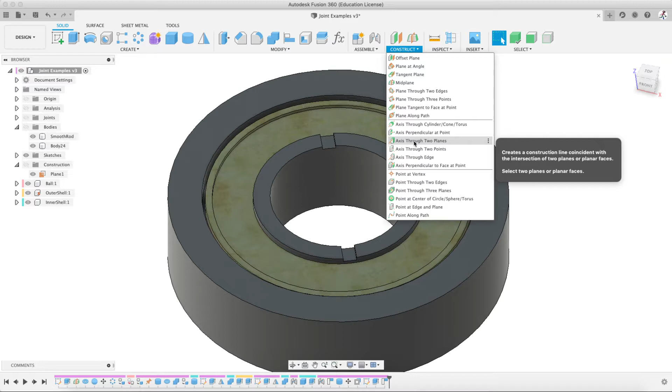Welcome back to another day of Fusion 360. We're going to be mixing and mashing different skills and workflows together, especially with joints and construction planes, because they're very handy. If you're not using constructions already, I really suggest you get the hang of how to use them, because they'll save you a lot of time and measuring in the future when you want to find a spot between things, over edges, or draw on something that isn't normally drawn on. Constructions are your best friend for that.

What you see in front of you is a basic little bearing. It's quite a large one actually, about 50 millimeters in diameter, still pretty large for most bearings people use these days. Whether this is a truck bearing, I'm not sure, but either way it has a few things inside it.

I used my favorite construction tool, as well as a joint tool that has a bit of a finicky process to get going the way you want for this type of object. It's great for very simple stuff - this is the rotating joint. But it's very difficult when you have an object like this, where the rotation center isn't on an actual thing, just a hole. We'll be looking at how to fix that, because it will apply to other joints, and I'll talk about the other joints quickly.

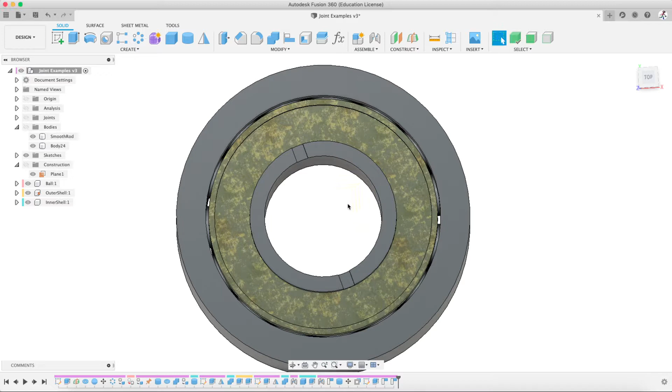In the meantime, I'm going to start at the very basics and we're going to work together. Create this bearing with me, right beside it - you can go right in the middle if you want, doesn't matter. But first, when you select your construction plane, we're going to create a brand new sketch and select the bottom plane or the top plane, depending. Doesn't really matter, it's the same thing.

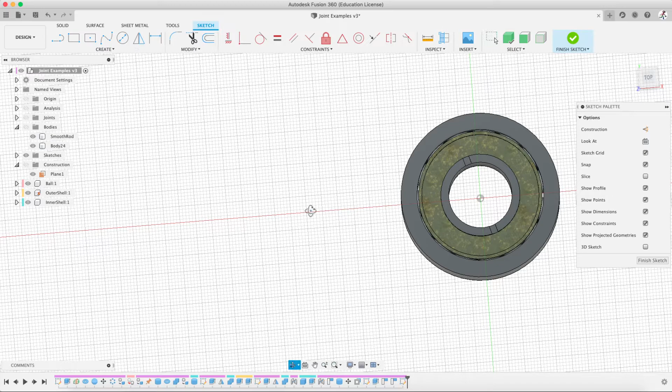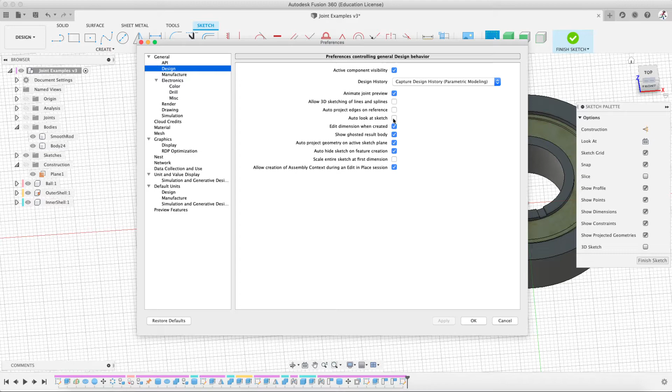You'll notice right away that my screen doesn't snap to the view flat on - this is my personal preference. It's in your preferences, I think under the first or second tab, called snap sketch to view. I'll go there right now just to show you, because it's nice to know. This is under Design, it's 'auto look at sketch.' Mine's unchecked, so this is just for me - don't worry if it isn't the same for you. I mentioned this in the previous videos.

So here we go, let's make a circle, and this is going to be the outer shell. Let's go 50 millimeters and just hit enter, that's it. Next we're going to make a second circle on the inside, and we're going to go 40 millimeters. This way we have an even 10 distance between them, and this will be the outer shell.

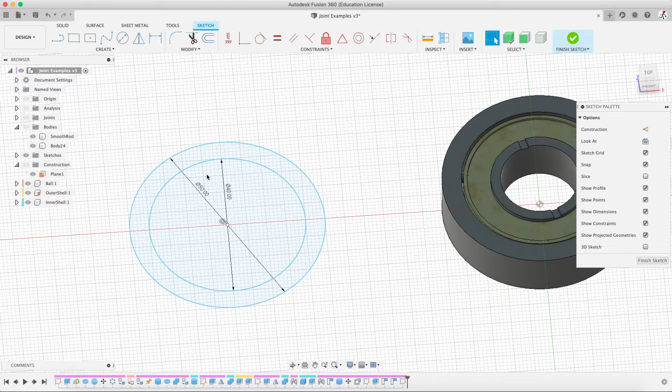What I'm doing is I drew a big circle, and then an inner circle that I'm only going to use a part of. So we can finish the sketch. We can hit E for extrude, or even Q for press pull - it does the exact same thing in this instance. Let's click on the outer edge of this circle, not the inside part.

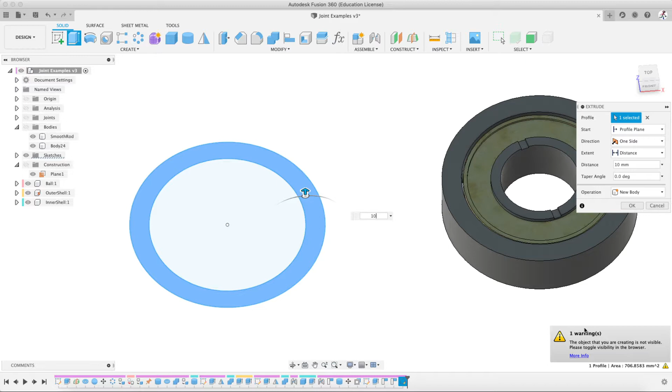If you have this clicked, just click in, it goes away. Hit 10 for millimeters and we will go up. I don't know why it's not working - E, 10, the object you're creating is not visible. That's why - bodies, okay, that's why.

So there we go, we have our object created. Next, we are going to have to cut out the inside, which is the same cutout for all these ball bearings. So before we even create a ball bearing, we are going to cut out the inside by finding the inside.

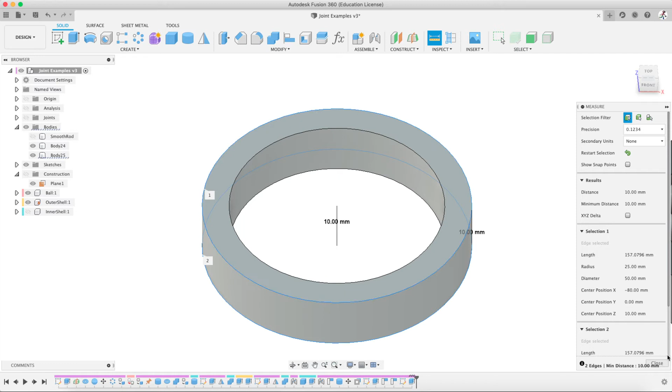Now, I know we are 10 millimeters tall, so I could create a cut in the middle and bring it down 5 millimeters, but let's do something easier. Under construction planes, go down to mid plane right here - mine is tagged at the top because I use it all the time. The mid plane is something that's super handy for really any object, especially when you want to mirror it later on, and we'll be doing that as well. So hit the mid plane.

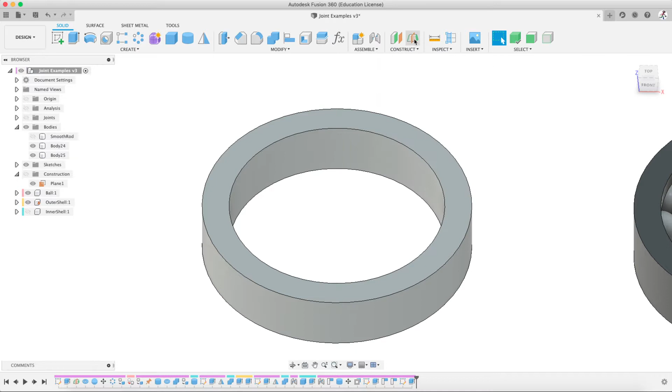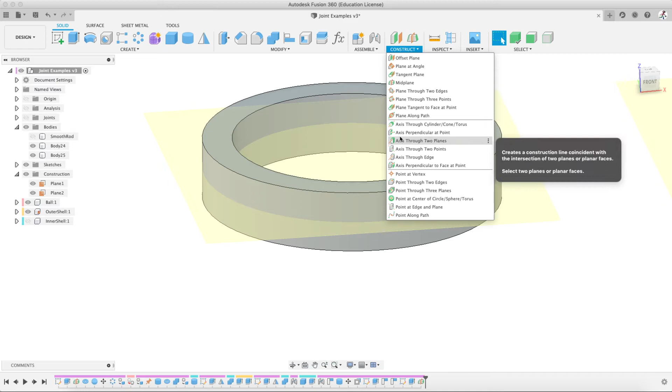All you do is select 1 or 2 edges, and what it does is create a brand new sketch plane that is adjustable. You can move it around if you want, but it's right between the two faces you selected. There's other versions, plane through 2 edges - if you select 2 edges, same idea, does pretty much the exact same thing, just a different selection process. There's way more in here - you can go through and figure out what they do pretty quickly, or just mess around with them. But there's a few you use often, and one of them, I promise, will be the mid plane. It is the best one, for me at least.

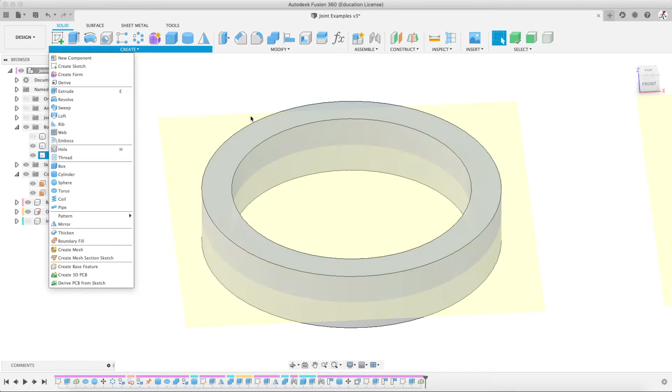Okay, so we have that. Now, a little bit of thinking here. We want to create what's called a torus, which is basically a ring. You could create a cylinder, but the edges won't be rounded. The reason I want a torus is because the balls are rounded, so I need that rounded inside, which will save me a few extra steps.

We're going to click the plane here. If it doesn't show up, the construction plane is just not on, that's it, the little eyeball. Click that, find the center of your object, which it should show you, especially if you're on the origin. Click the center and pull out.

Now, the outside is 50 millimeters, and the inside is 40 millimeters from my memory. And the thing with toruses is that you want to be building from the center of the torus ring. Let me show you.

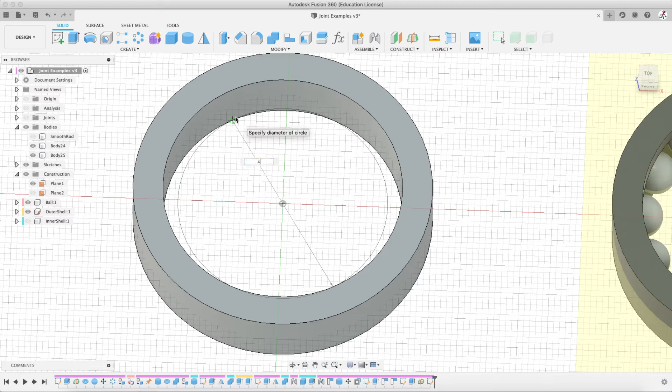If I go 40, it goes pretty large. What you're doing, if I remove this object here, is the mark you're putting, which is 40 for us, is the center of the ring, right in the middle of it. That's where you're measuring from. So it's not measuring from the inside edge or the outside edge, it's the center.

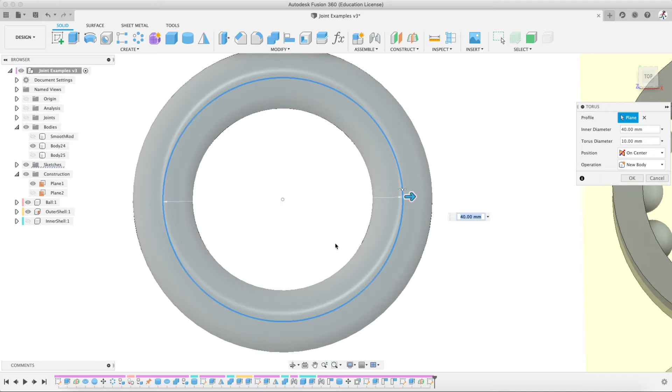So you have to kind of divide your torus size in half in your head, that's fine, whatever you need to do for toruses. We're going to make our torus diameter 7, because if it's 10, it's going to come right to the very edge and be impossibly thin in real life. It wouldn't work. So we're going to go 7 millimeters, which gives us a nice buffer on our bearing.

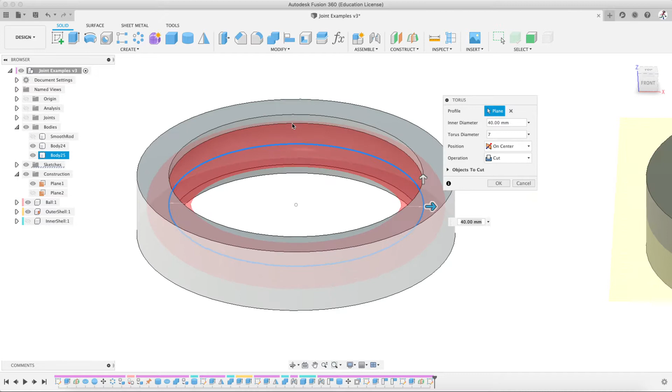And I want to cut. You can create a new body if you want to keep it, but we don't need to keep it. So we're going to cut, and it will give us a nice, very clean inner ring cut.

Next, we're going to create our ball bearings. Now, since our torus is 7, actually in real life we should have made the torus 7.1 or 7.05 millimeters to make it really realistic, but we're not.

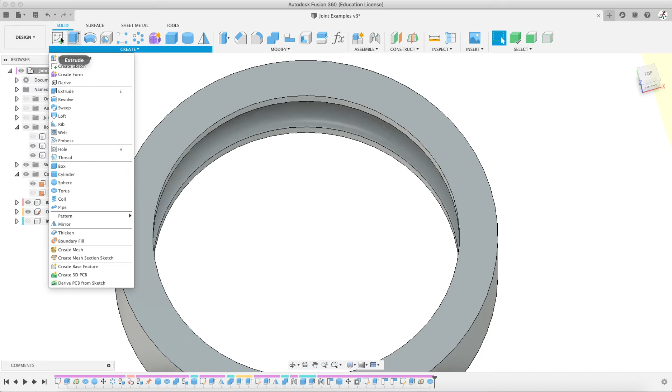So next, we're going to make a sphere, and this is something that is very difficult to make in the sketch environment, the toruses and the spheres. It's much quicker to just do it in the 3D environment. So if you're saying, why aren't we doing it with create a sketch? That's why. There's some things that are just better in the 3D environment, and this is one of them.

Sphere, I'm going to go back to my construction plane, turn it on. That's another cool quirk of Fusion 360. Once you use a construction plane, it typically gets canceled out. It doesn't disappear, it doesn't get removed, it just gets turned off. You can just turn it back on. You can name it if you want to.

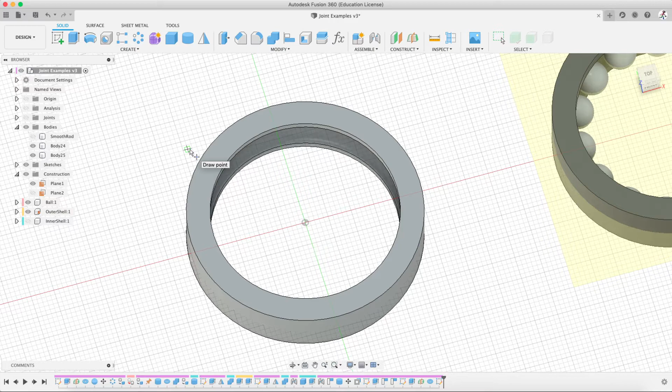So select your mid plane again that you made a minute ago. Go back to the center. Create a ball, 7 right there. This is for me, maybe it's not for you, just make sure you push 7. New body. Perfect, done.

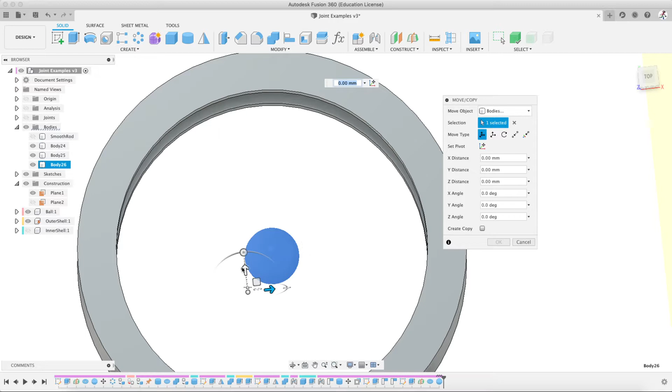Okay, here we go. So now we get to line it up with the outside. If I move it over, let's move it up actually on the Y plane, I'm guessing. Since this diameter is 50 and the inside's 40, I guess I have to go half that for the radius of 20. And am I right? I think I am. Now, how do you know?

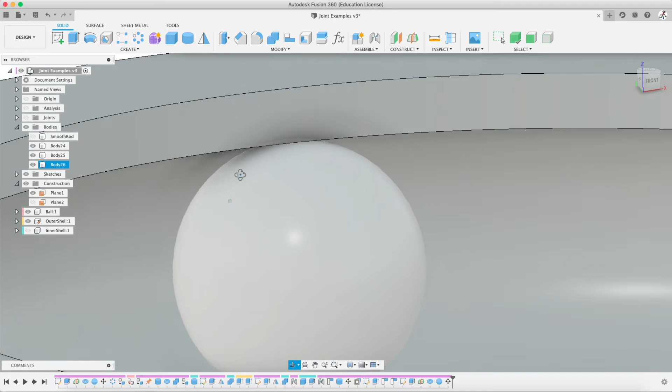Because here's another really handy little workflow tip. You can't see everything all the time, and you can zoom in for days and spend 5 minutes trying to align things. No, there's no point in doing that. So what we're going to do is use another special tool that I also use all the time, and I hope you do too, it's called section analysis.

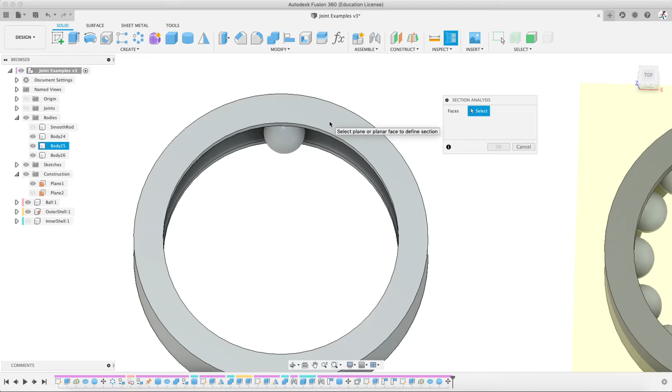You can pin it to the top. I really suggest you should, because it's super handy, you'll see why. If I click that, I already have one created, let me remove it. If I click it, what you're doing is not cutting something up, you're just passing through the object like it's not there, like the old-fashioned clipping in video games, you just walk through walls. And this is where we really want a sideways edge, but we can look at the top to start.

So I'm going to click on the top of my outer bearing and drag it down. What's happening is it shows you these lines cutting through the object. You can find exactly what you need and it stays there. It's a permanent thing, but you just turn it off and on so you can come back and check things out.

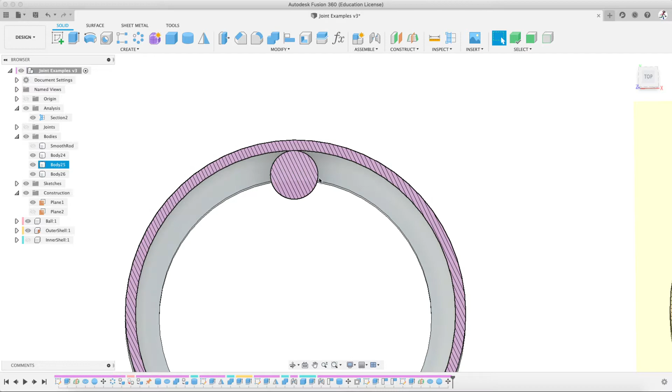So I can see right now, if I dropped it down 5 millimeters from the top, that's half of the height there, because the height's 10. You can see that bearing is right against the edge, so it's perfect. Exactly where we need it.

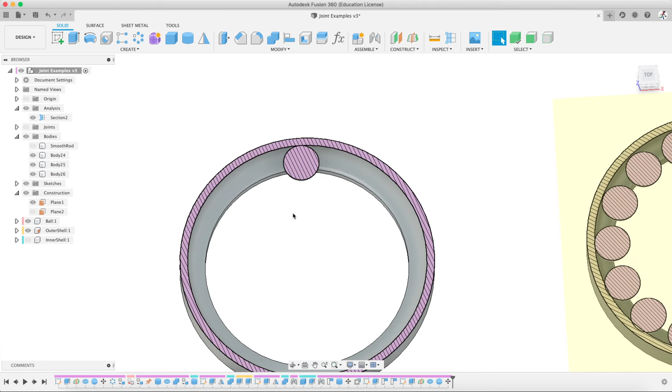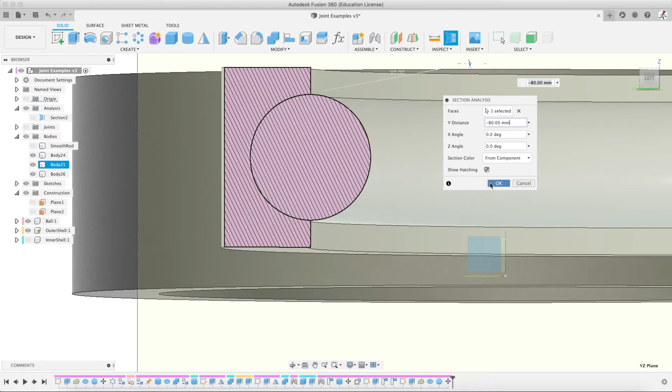And really that's it, section analysis. If you want to see the sideways view, we can make a new one just for reference sake. I'm going to put it on the origin point, remove that plane, and I can just drag it over until I find my ball bearing. You can see again from the side, you have a section analysis on the side. These things are super handy to use, really great tool. Just lock it on the top beside inspect.

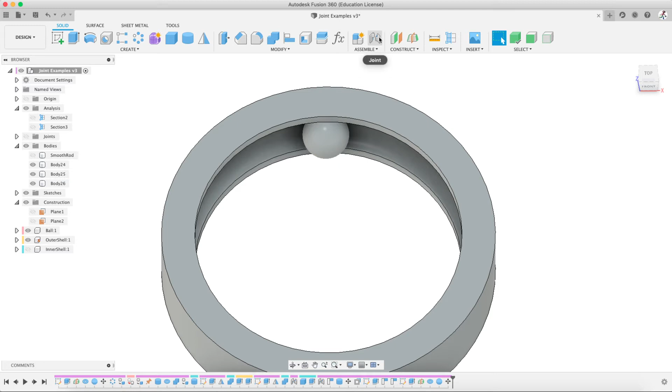Next, we are going to make a constant supply of these ball bearings all the way around. But this time, we are going to first create a component out of this ball bearing, and the reason being is that your joints do not like bodies, they only like components. So let's call this ball 1.

And we are going to click it, right click, and go create components from bodies. So all you do is right click there, you can right click here as well. Click create components from bodies. It's all right there. There we go.

Now let's see what happens when we make multiples of these, because I have a hunch it will not be put in the same component.

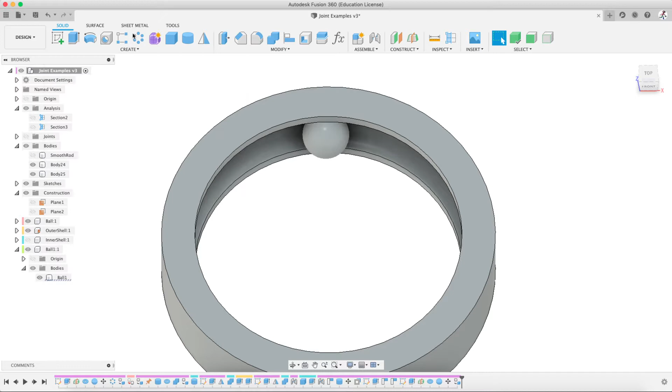Back in video number 2, we used the pattern tool, and this is another handy tool. So just select whatever you want, make sure it's on bodies, because you don't want the face, that's just the outer shell. You want the whole body to be moved. You can go components too, but we won't be doing that. Let's just go bodies, because I want to do a different sort of process after this of adding to our component.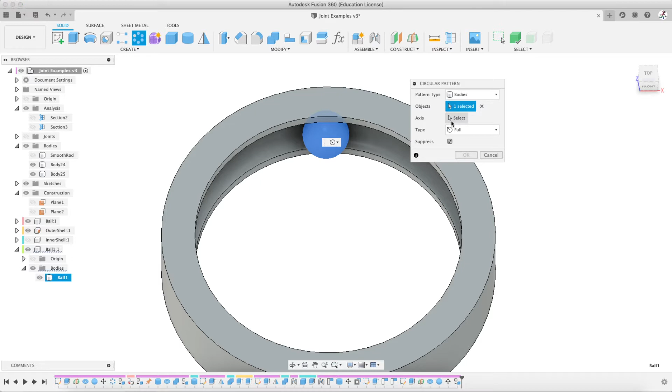So we're going to take this ball bearing, and copy it around the edge. So find part of that edge. Doesn't matter, there's no center to click on, so it's just whatever ring follows that same direction. And we don't need 3.

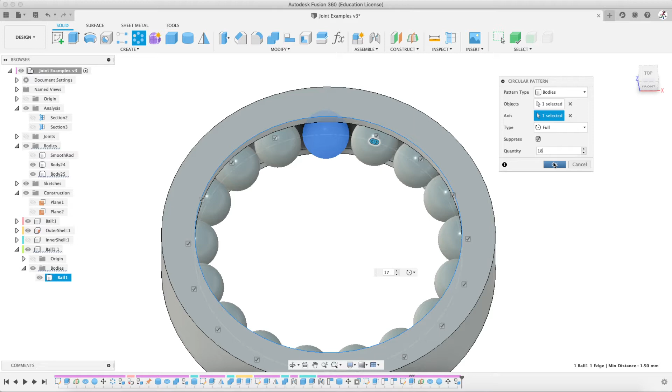Let's see what 25 does. Way too many. How about 20? Way too many. How about 15? That's fine, 15 looks good. You can put whatever number you want. If we go 17, it might be even closer. 18 looks a bit snug. So I'm going to go with 15, and you can do whatever you need to do.

Now, handily enough, it put all of them under the same component. So when I click the ball component, it goes to every single one.

If this doesn't happen, which I think used to be different in Fusion—I might be wrong about that—all you do is, under your bodies window over here, click the one you want and open up your component list. So I want to put it under the ball component, your bodies. You just drag it down, and what happens is it adds that body to the component. So if you want to categorize stuff into components without recreating it like we just did, let's say you make a whole bunch, you just drag it down and it goes right into the component, it's locked in, and you are set. That's really it.

Okay, next step, we are going to make the inside ring. So we are going to create a sketch. Click the top of your outer shell, and then we're going to go to our center diameter circle, which is right here, first one. C is the shortcut. Find the center.

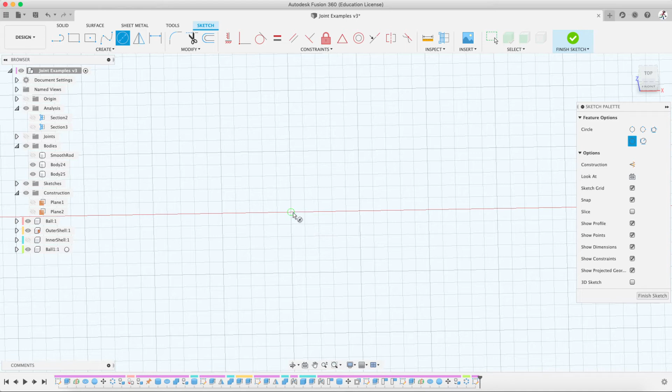The center is usually a little ring. If you can't find it, if you get an X, just kind of drag away and come back. You want the ring, it tells you it's the center of whatever plane or object you clicked on. If I clicked on a different object, it would find the center of that. So make sure you click on the correct object. Luckily, right now, we only have one to choose from.

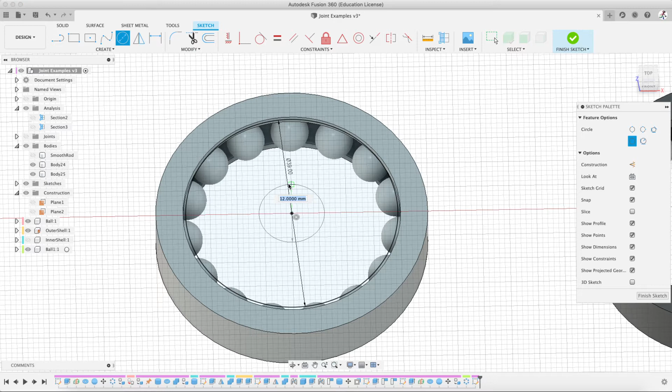We'll click that. We don't want to go 40. Let's go 39, make it a nice, tight-fitting bearing. I mean, it should be tighter technically, but this is good for now. 39. And then we need a center ring, so how about 20? 20 millimeter center hole. Good, we have 39 and 20. Hit Q or E, click that outer shell of that, and drag.

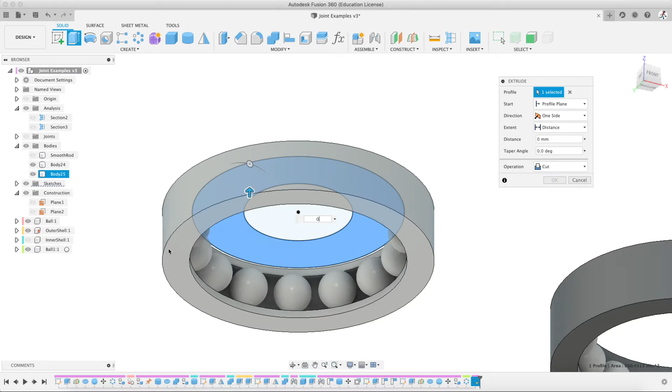You can click the bottom here. You can go -10, or if I go 0, you can just click the bottom of the object you want to align it to, and it goes right to the exact same distance.

I don't want cut, I want new component, but we're going to rename it properly. The reason why I do this is my workflow - I typically make the body first. I name the body inner shell 2 because I already created an inner shell over here. The reason why I do this is because when I make a component, the component takes that name and copies it onto itself. If you look, the body is called inner shell 2 and the component's called inner shell 2. If I just created a component from the start without creating the body first, it would both be called component whatever and body number 26, and I'd have to go back and rename both individually, which is something I don't like doing. So I just do that one extra step, which saves me a step or two.

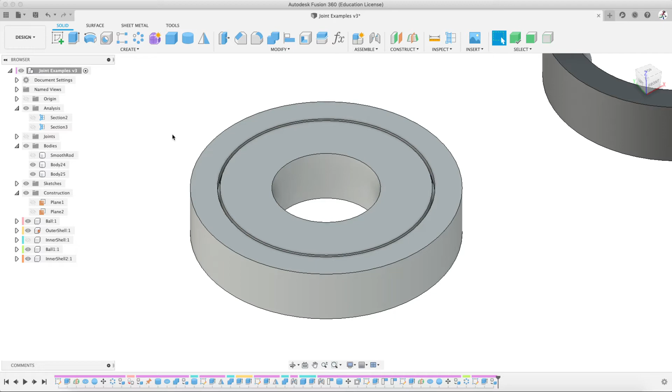Maybe it saves me one step - it's just a personal thing. Here we go, we have our inner shell, and we have our outer shell 2. Right click, create body, or create component, and we are locked.

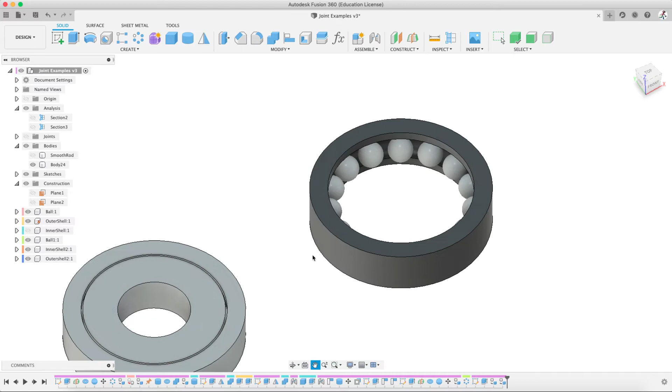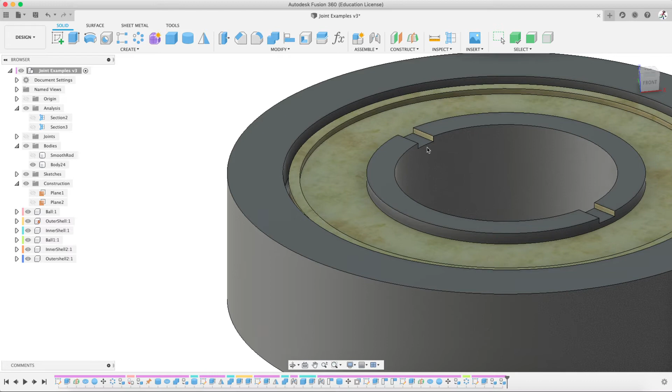Okay, now we're going to use the joints. Now it's not as pretty as my other bearing - you can make it as pretty as you want. Just for future reference, I extruded the outer shell another 1 millimeter on both sides, as well as the inner. I made these little notches because some bearings have notches to lock onto, and it also shows you when it's turning - really nicely, you can see the notch moving. And I made an inner ring here on both sides, using the center construction plane right here.

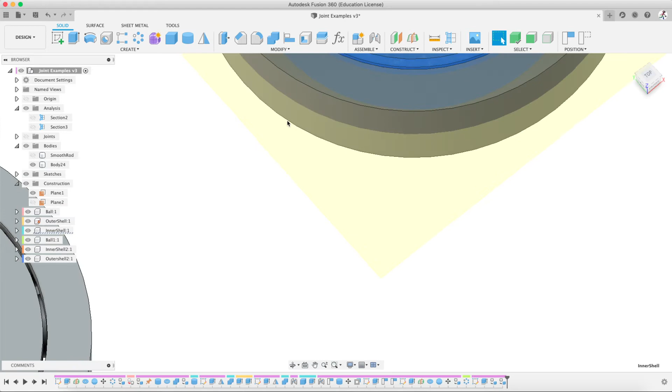I just used the mirror command. So I created a ring, then made a new body, mirrored it with the mirror tool using this as the reference, and a copy down here, then just joined them together. I'll show you that in a minute, but I won't do it all because it's just extra stuff we don't need. So let's do some joint work.

First, I don't need the inner shell, I only want the bodies. Now, luckily with the joints, it copies the same joint - it sort of locks the same joint together when you're working with a single component. So it doesn't matter what ball I choose, I'm going to choose the first one, which I think is this one. When I apply a joint to this ball, it applies it to them all in sequence, and they're all locked together in the same disc shape that I have here.

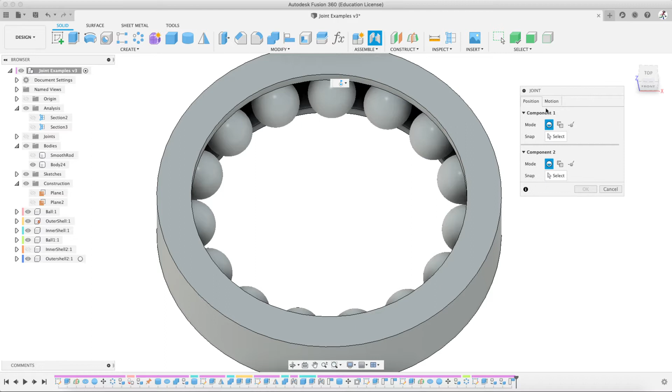Whatever shape or direction they're in, they'll be locked together within that joint. So here we go, create a joint, yeah, capture position. I'm going to select my first object, which is the ball - this stuff don't worry about, just make sure it's on simple. For the second object, I'm going to select the little ring edge here. This is where we have to do some adjustments, because if you look, it won't do that for you - it'll shake.

Now that, under motion, is your joint type. The rigid joint is basically locked in place - if I move the outer shell, these will move with it from wherever they're locked in. Right now they're locked in here, I can move them over there and they'll be locked in, but they won't actually move. Now the other ones too - sliders, which is on a single plane, back and forth. Then we have cylindrical and pin slot, which we could go into details, but there are other videos online right now for those, you can just look online.

Planar, which is just - it stays on the same plane surface and moves in any direction. Then we have the last one, which is a ball joint - basically something that rotates around a ball like this, but you can give it full movement. You can adjust different things like limits, which we will do as well. But we want a revolute joint, and this is revolving around a center axis.

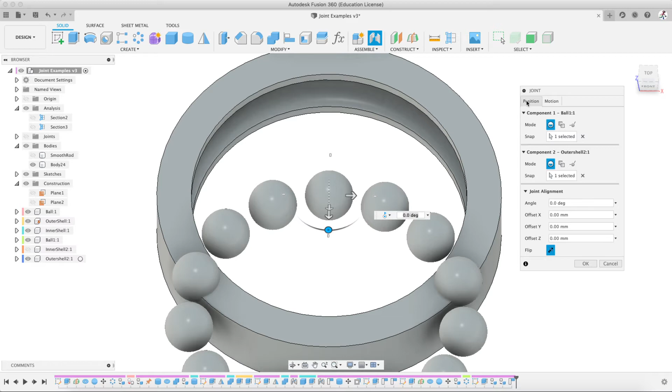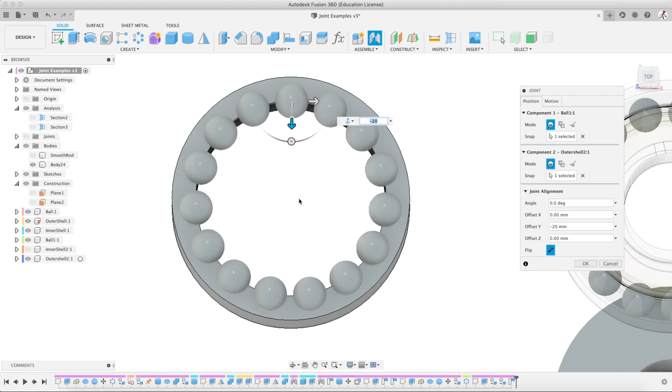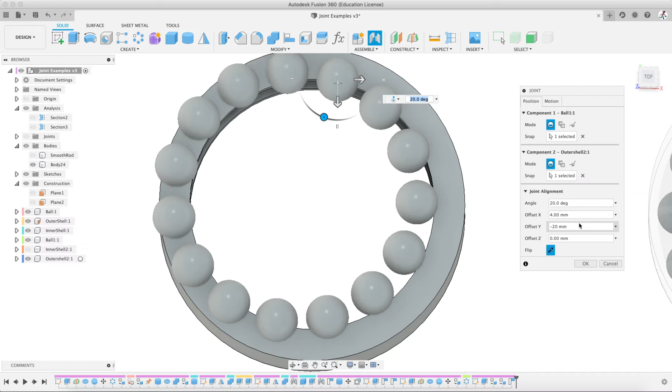I think with the other one I made a mistake and selected the wrong ball, so it was slightly off. If it's not lining up straight, like when you push minus 20 and it's angled off like this, you can see it doesn't align correctly - you selected the wrong ball. You can go back in your history below and see which one it is. Make sure you have the right one, otherwise you'll get that sort of issue.

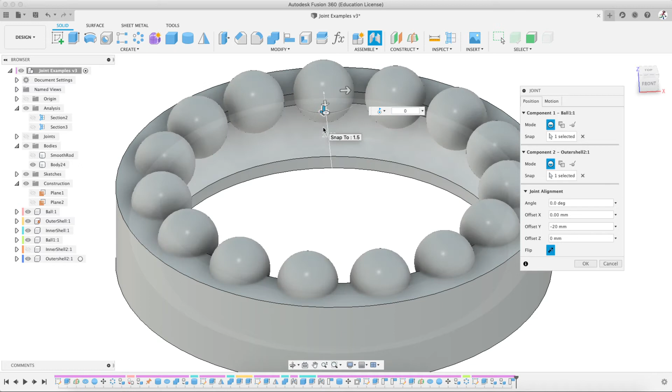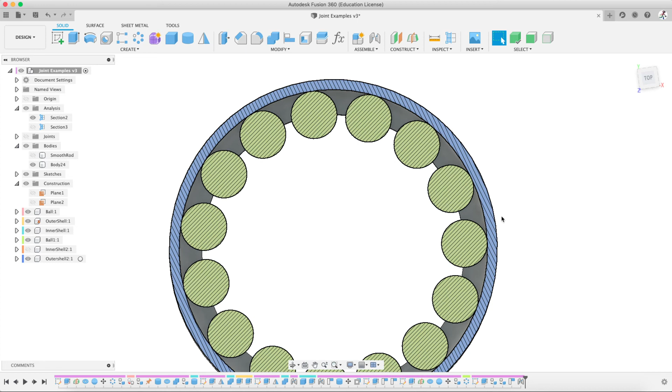Let me go back here. Capture, motion, perfect, select, and select. I'm going to -20. I'll explain this as quickly as I can. I want minus, was it 10? No, it's not 5 is it? Interesting, because it was up here I assumed it'd be all the way down. It's one of those slips you get when you're thinking and moving all at once. There we go, we're locked in now, and we can move it later. If I check my analysis, I can see they're all exactly where they should be.

So watch this, here's your first problem, and this is something people always forget with joints. I'm going to grab this, because I can grab these and rotate around, just drag - watch what happens. The whole thing moves. Here's our next thing: Fusion wants something to be the reference. Fusion loves references and lists of references. I've mentioned this a ton of times - keep the references as simple as you can, and especially keep them aligned in your head as you create things, because you can really get messed up.

Our reference for this ball bearing is going to be the outer shell, which will be locked in space. So what you do is select your component for the outer shell, right click, and do what's called grounding. All it does is stick this to whatever ground we have in Fusion, and it won't move anymore. Because if I don't have this, I can drag it. But then if I ground it, I can't move it anymore - I click, nothing happens. That's what grounding does. Make sure you capture the position so it stays.

Now I can actually rotate these all the way around. That's it, as simple as can be. We have our offsets done, we have our grounding done, which you'll need for a lot of joints - you need that reference point for Fusion. And we have our joints now moving in the right direction.

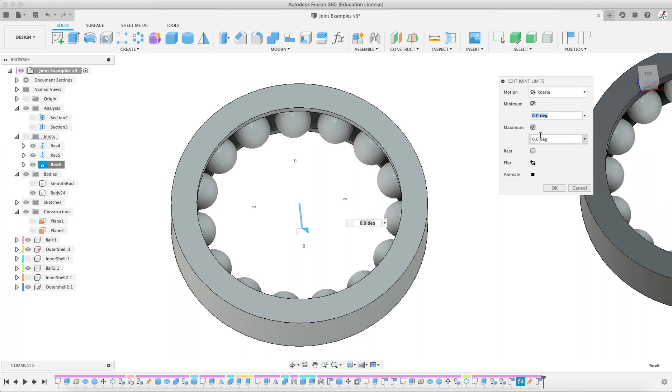The other thing I mentioned was adjusting things. I don't need these joints, but this one is the one we just created, and we're going to work with the joint limits. This won't be for this exact bearing, but let's say something else - say you only want it to rotate a certain amount, like a clock hand, only going halfway around. You click the minimum and maximum - they both highlight anyways. Your minimum usually stays around 0 degrees, and your maximum we want to go 180.

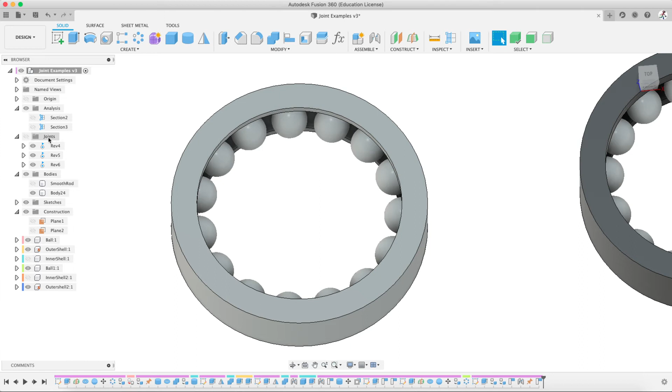What happens is you get this limit where it can only move in this space, it won't move over in this space. So if I rotate this now, it should stop - yeah, it stops. It won't move anymore, my mouse is moving but it's not moving all the way around. So it locks - that's what a joint limit does. You'll have joint limits for many, many joints, and it also depends on the object you're creating, but that's the basics of that. Again, there are so many videos online I don't need to go through it in detail.

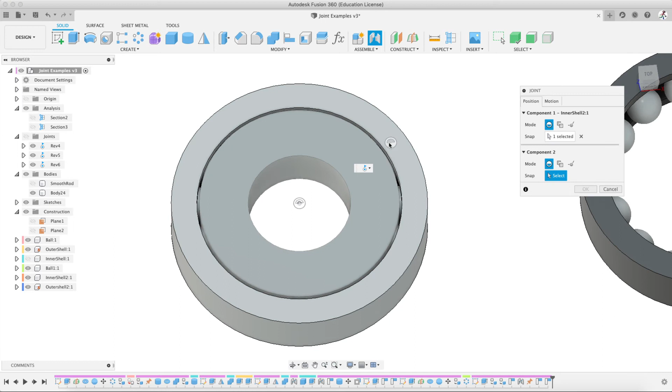The next step is to take our inner circle and do the exact same thing: create a joint, select our inner circle, then select our ring to rotate. Hit OK. This one we don't have to offset because it's technically in the exact same center ring as the outside circle. So now I can rotate it - you can kind of see it's rotating.

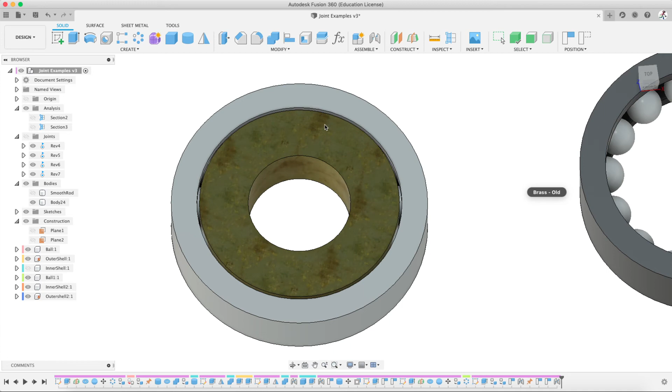If I add a texture to it, you can see now it rotates even more - same thing, but look at this: the inside balls and this part are usually rotating together. They're not in lockstep, but they do rotate at the same time - just the balls are rolling, so it's slightly off.

Some physics for you if you want to really get into that kind of stuff.

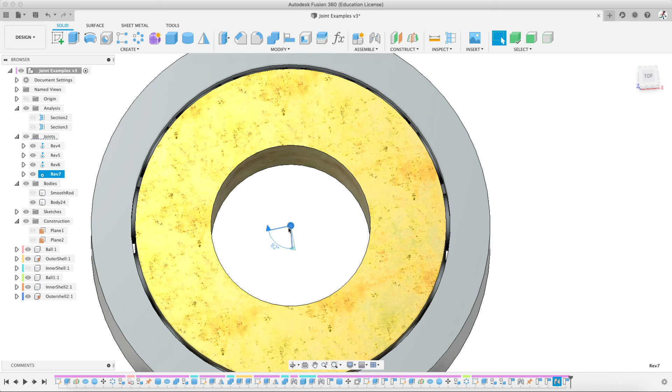So here's the next step. We're going to lock these two together. This is a second tier joint, something people don't usually think about, and it can really mess up your objects if you go too far with this. Fusion does not like multiple joints on the same object doing the same thing, so keep track of it in your head as best you can, because there's no real list of how many are on what. When you select all the joints to look at them, it doesn't show you much, just a little dialogue in the middle of whatever kind of joint it is.

So this is where people get messed up and really lock their projects. We are going to take the outer shell, get rid of it for now, just eyeball it out. Oh, we didn't cut the inner shell. I'm sorry, let's do that.

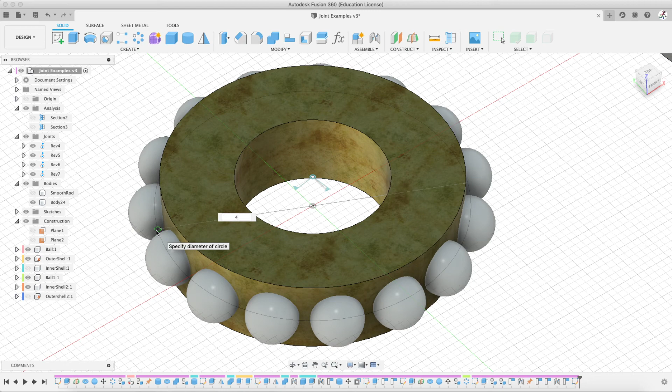Torus, I need my plane. Select the center, I'm going to come out 40. We need it to be 7. This is going to be pretty quick. Don't cut it, I want new body. The reason why I don't want to cut it is because it will cut the balls as well.

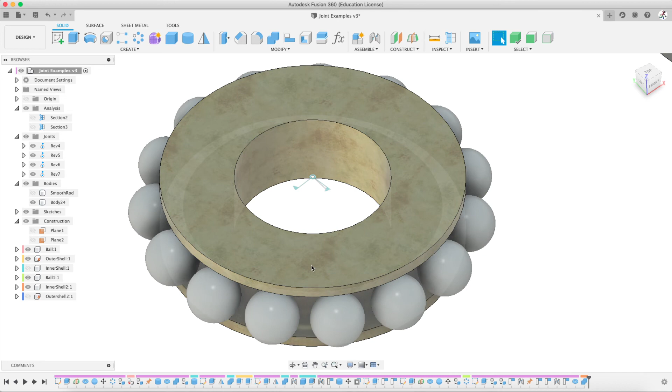So here's our combine tool. Select our inner shell and our new little torus. Cut. And now the bearings are still there, but it only cut what I told it to cut. And now it's done. Next step is to lock it all together.

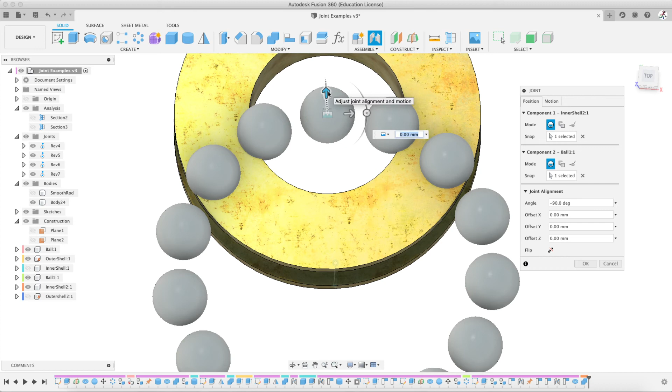So here is our standard joint. There's two ways of doing this, this is the long way first. Select your object, make sure it's on rigid, select your secondary object, and it locks together, but you want to adjust offsets, -20 and then 5. You see so many steps here, and now it's locked. So now if I rotate, they rotate together with the outer shell, and if I look right here, you can see the edges, they're all rotating together. That's the long way of doing it.

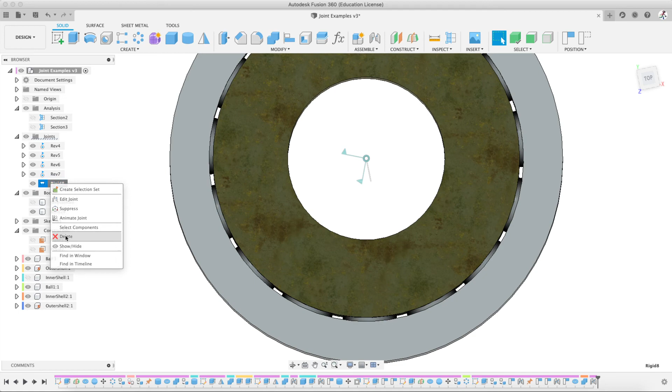If I take that rigid and delete it, here's the best way to do it, trust me. Select your inner shell or select your ball bearing, doesn't matter. Hit Shift and J on your keyboard. That doesn't matter, but as-built joint is sort of a quick rigid joint. You can select other ones, but this is the quickest way to create a joint, and I typically use it for most joints, but mostly the rigid joint altogether.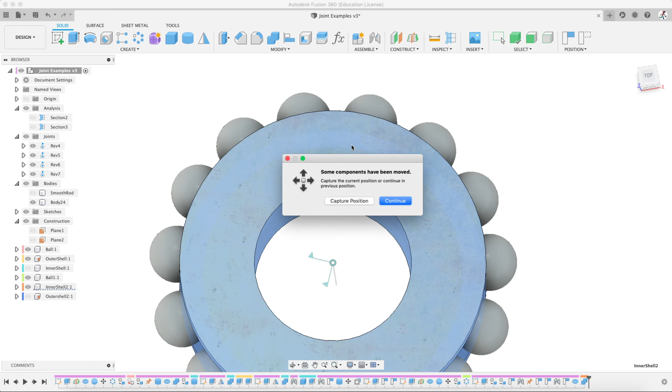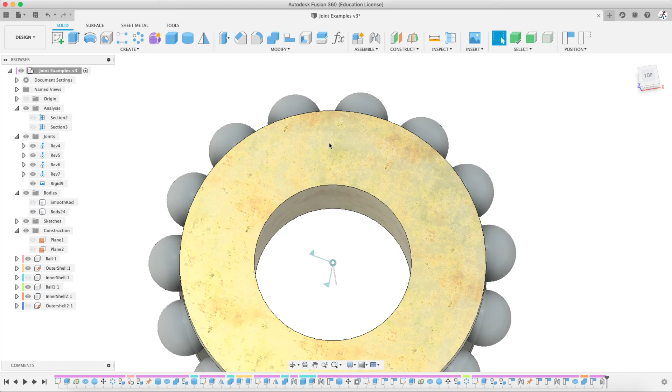So again, it's first object you want to start with, Shift J, hold Shift, push J for jack on your keyboard, and select your next object, and now that's it. They're locked, really simple. Let me go back and show you again. Back, back, back, back, there we go. They're not locked. Click, Shift J, click, done, locked. Much faster. There's no more offsets to change around.

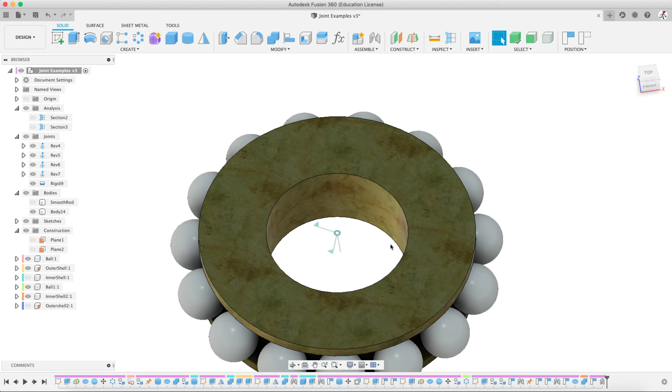And the real big difference between these is you get to keep the offset that you already have between every object, because this is offset from here, this is offset from here, this is offset from here. It's all different offsets. So instead of having to redo those kind of things like you saw a minute ago, that's the quick way of doing it.

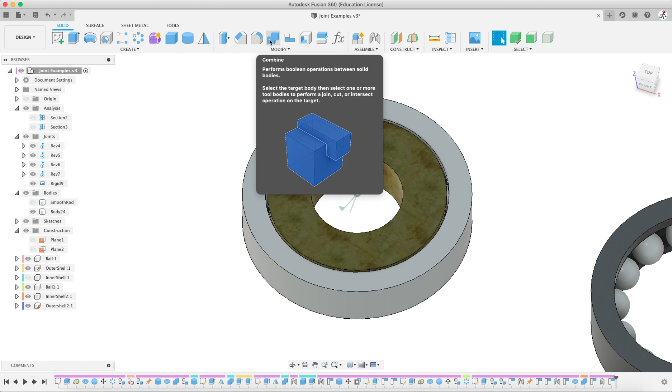So this is the basics of sort of a next step in learning to use some key tools in Fusion, where we have the construction planes, which are super handy for creating new objects. We have our joints, we use the combine tool, which is super common. If you don't have it here, I really suggest you take it and pin it to your top.

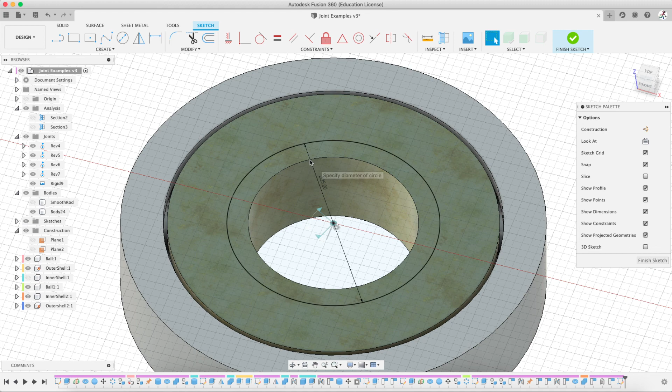And then we also used, we didn't use the mirror yet, let me use the mirror, and this is with the plane as well. So I'm going to create an inner ring, which most bearings have. Select this plane, select here. That's 20, let's go 25. That's good, hit Q, you can hit E as well, doesn't matter. 1 millimeter, new body.

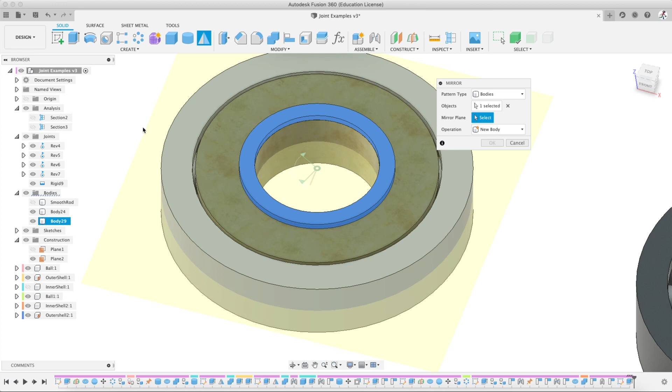Now I didn't join it together for this reason. New body, select here. Here's what I'm going to do: my plane, mirror. The object I want to copy is already selected. The plane I'm going to mirror it on is our center plane. Done. Hide, combine, click, click, click, move to join, done. Really fast. You can see how quickly you can make objects if you know these steps.

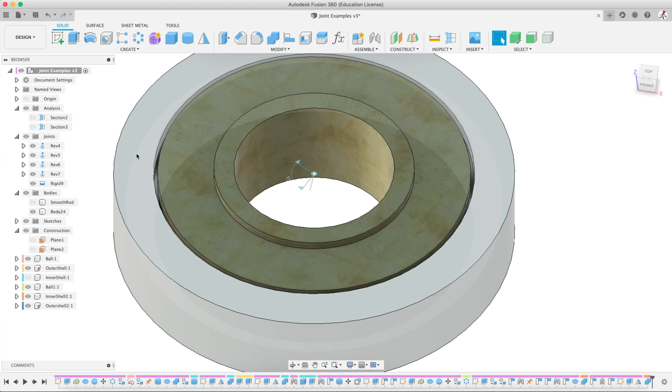You get the hang of it, that's really it. The next thing that's kind of my pet peeve is hide those joints, because I really don't like seeing those joint limits. If I want to see them, I'll bring them up. Otherwise, I always hide them myself. Maybe you don't, up to you.

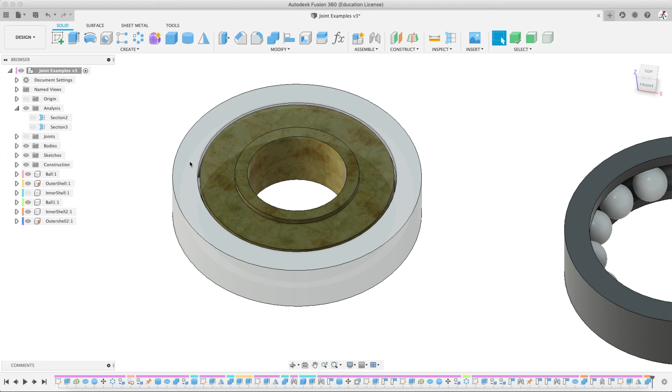Analysis, let's check it again. Yeah, looks good. This is not a full bearing, it's missing some pieces and parts and little standard things on it, but this is the basics of it. Now we have a bearing that works, and the initial one doesn't, because if you look, the inside balls don't move. This one does.